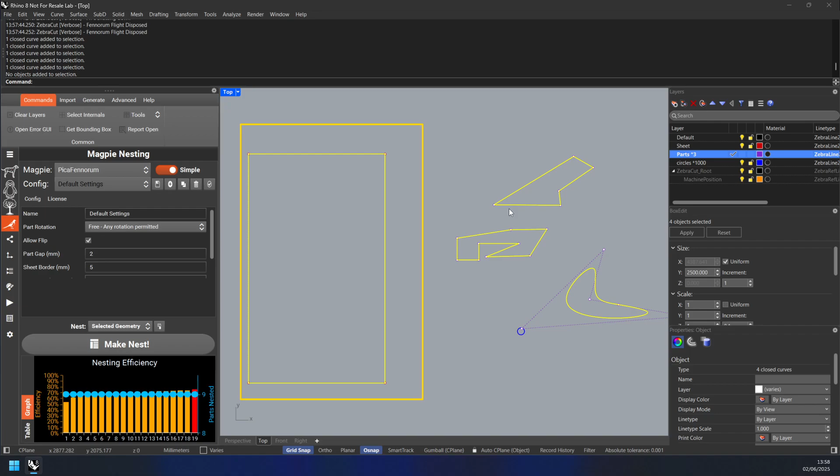I'm going to make my first nest using the Magpie in selected geometry mode. I'm going to select the sheet and hold down shift and select my parts. You could also right click on a layer and say select objects. Once I've got the sheet and the parts selected for my first nest, I'm going to say make nest.

Those 9 parts will then be nested nice and efficiently. We can let it run for longer, but that looks good enough for our purposes.

Once I've got my first nest, I'm going to select it, and then I'm going to select my filler parts, which are here, and you'll see they're on the layer with ×1000, so I can do up to 1000 circles as my filler parts.

I'm going to make very sure that I'm in add to nest mode. Normally you'd be in renest, but in this case you want to be using the add to nest functionality, which allows you to do a second round of nesting around the nest.

It's really important you select the whole nest and all of the parts within it, and then you hold down shift and also select the filler parts, and in this case I've got ×1000 there.

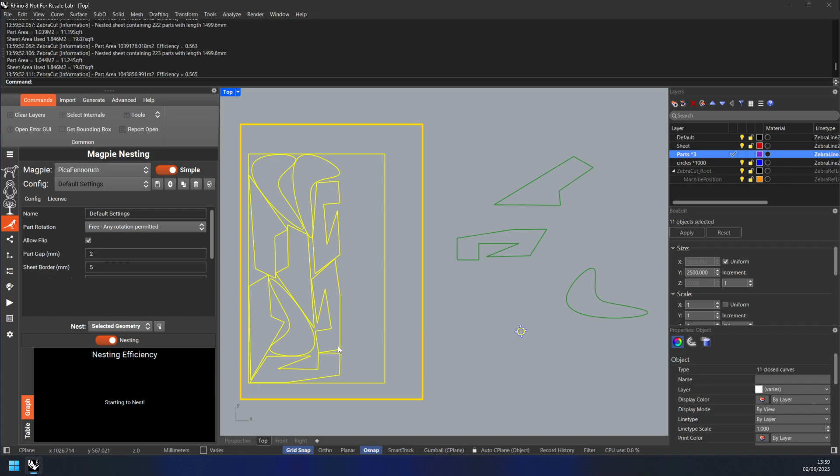So once I've done that, I'm going to say make nest, and what will happen is it will place as many circles as it possibly can into all of the gaps in the nest.

Now you can of course use different configurations, different part tolerances for the second round of nesting if you wish to, and you'll see that's now gone ahead and nested about 200 parts or so, 200 circles.

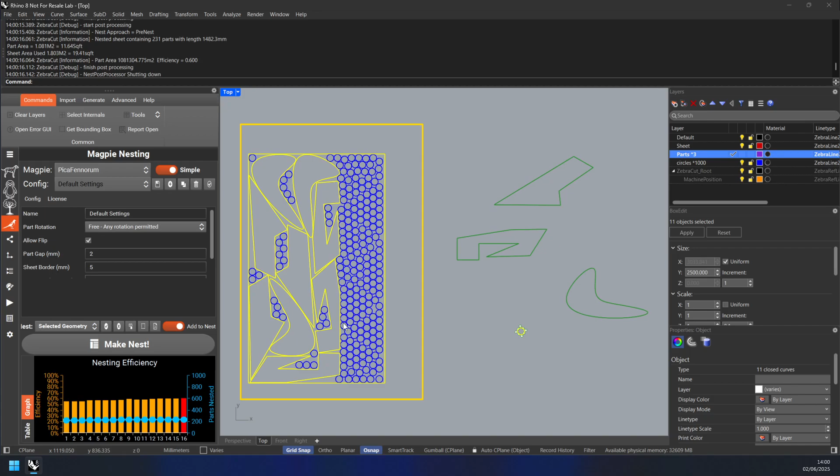So a really efficient way of being able to make the most of your material. That's now ready for production, for cutting, and in order to send those off to the machine, I'm going to...

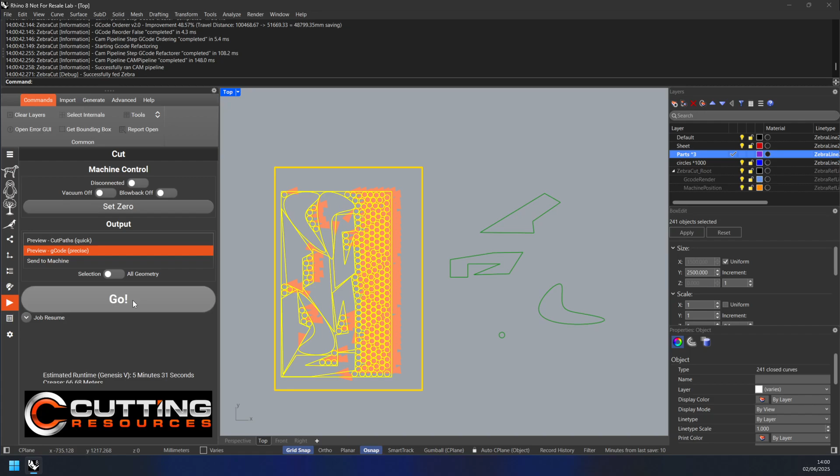go to the cut tab, and I'm going to use this in selection mode again, so make sure I'm in selection mode, and then I can go ahead and send that off to the machine. There we go, all ready to be cut.

So that's add to nest. Key thing to remember is that you need to make sure you put it into add to nest mode, and also that you select the whole nest and all the parts that have been nested.

And you can do that using the shift key, or you can right click and then say on the layer select objects. It's also very useful, and you can do that using shift as well.